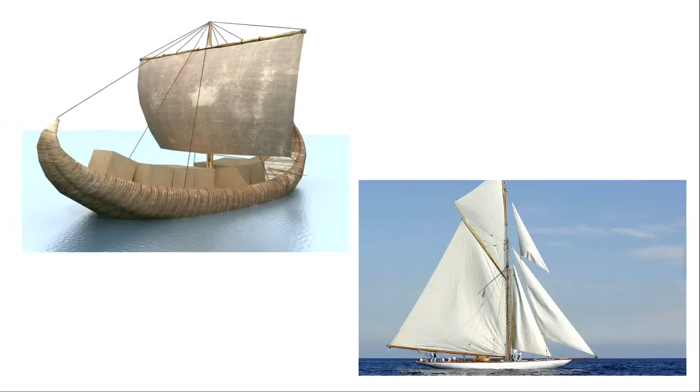And then we have our atmosphere all over, which consists of a very large area. Maybe up to 100 kilometers, if we assume we have some kind of atmosphere, there are so many mixtures of gases over there. And apart from 100 kilometer altitude, is it vacuum? The question is, it's not actually vacuum. It's again a fluid which has a higher intermolecular distance.

So when we talk about the atmosphere, it's a continuum fluid, as if the fluid is continuous. But when you go outwards towards the outer atmosphere, it's not continuous, you call it a free molecular flow. So nowhere is there an escape from the fluid. Starting from biomechanics, from our eyes to aircrafts, everywhere we actually face fluids.

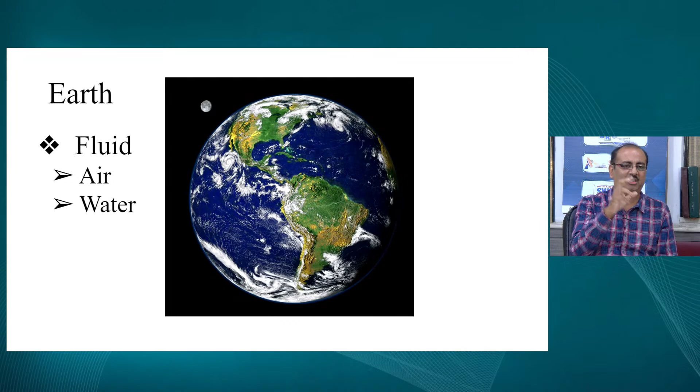Let me come to some of the very typical problems which are seen, some of which have been seen from history itself. There are two pictures shown in this slide. The very first picture is basically a boat which might have been utilized about 1,000 or 2,000 years ago. If you look at the boat, there is a particular sail made of cloth, and then there is a shape of the boat. But then onwards, if you look at recent times, the complete sail has a different shape, and the boat itself has a different shape, probably kind of a streamlined shape.

What could be the reason? Initially the major aim was transportation, but if you look at today's boats, there are so many things—it's being used for transportation, for wars, in sports. So there are plenty of applications of this kind of boats, and based on that, several changes have been made. Were these changes made on their own? No, there are engineers involved, and some design modifications have been made to the sails, depending upon the requirement.

Now let's look into the other slide.

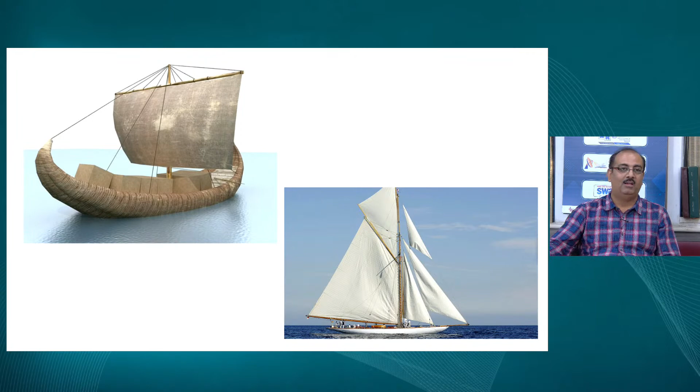Let me show you a typical video of what happens if there is a sudden gust of wind onto a particular chimney. This is an old video which I have taken from YouTube. If you look into this chimney, it is going to vibrate with respect to the wind. You can see the vibration has started, and further it will vibrate more rigorously. If there is this kind of rigorous vibration and it matches with the natural frequency of the chimney, obviously there is going to be some kind of failure.

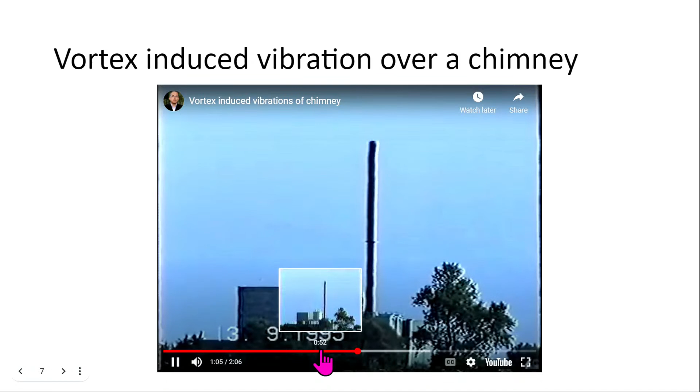So this is very important to understand what exactly is happening over there, and we must get into the physics of the fluid over there. Let me show you another one of the very famous engineering failures.

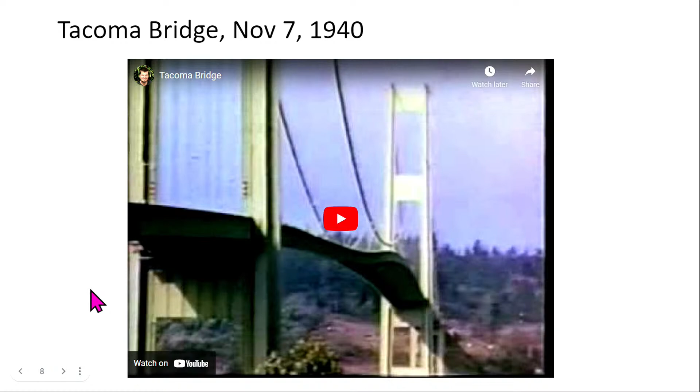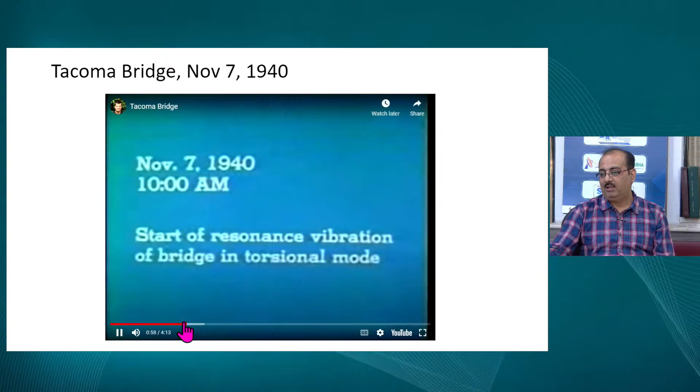At a very small gust of wind, the bridge basically started to vibrate. Once the vibration was higher, it actually matched the natural frequency of the bridge, and the whole bridge's middle section collapsed. This is why I said this is the most famous engineering failure.

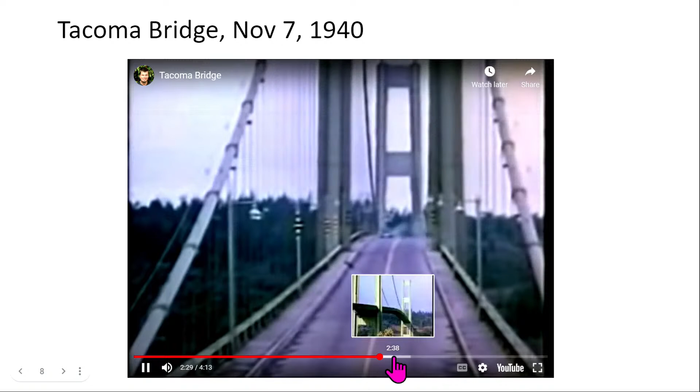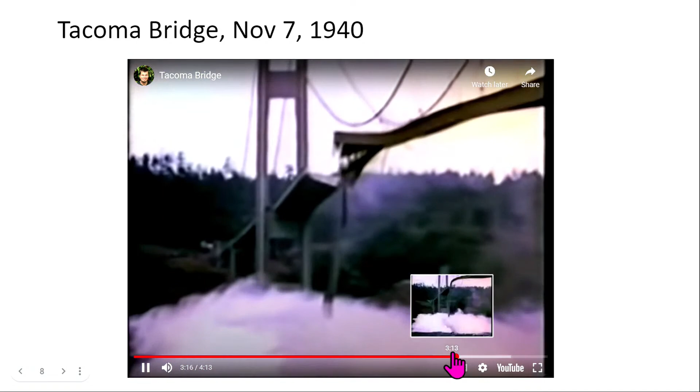Look into the video and see how it is vibrating, how dangerous this could be. Ultimately, a car was stuck in between, and if you see at the end, the middle section of the bridge actually collapsed.

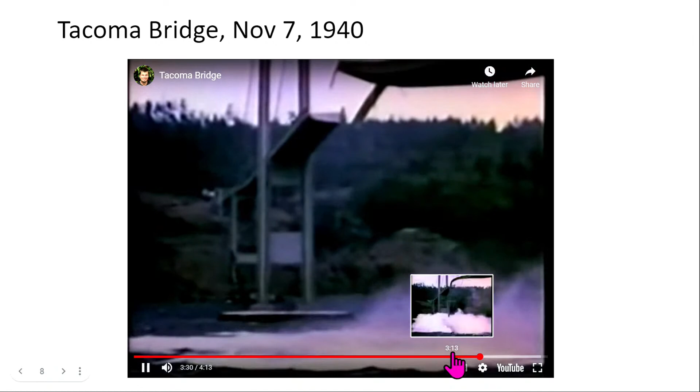The question was, what happened? Later on, it was found, and I'll show you at the end of the slide, that it was aerodynamics, or fluid dynamics, which was responsible for that. So it's very important to go through all these things.

Another very typical creature everybody has faced is a typical fly. You try to hit it and it has such a fantastic maneuvering capability that you will not be able to catch hold of that fly.

The second, or third, is the mosquito. Again, the mosquito itself keeps flying at a very constant speed. What kind of fluid dynamics, what kind of wings, what flapping frequencies, what is it doing? Another fellow is the dragonfly.

All of us might have seen in our childhood, we used to tie a small thread and play along with the dragonfly, but it's so stable that scientists are actually researching the wings of this dragonfly. It has a kind of corrugated wing surface which actually has lesser drag. It basically makes the flow turbulent.

This is a very detailed discussion, but later on, if somebody wants, they can always get in touch with us to get the details of these things. So again, this has a different kind of aerodynamic capability to fly and keep itself stable.

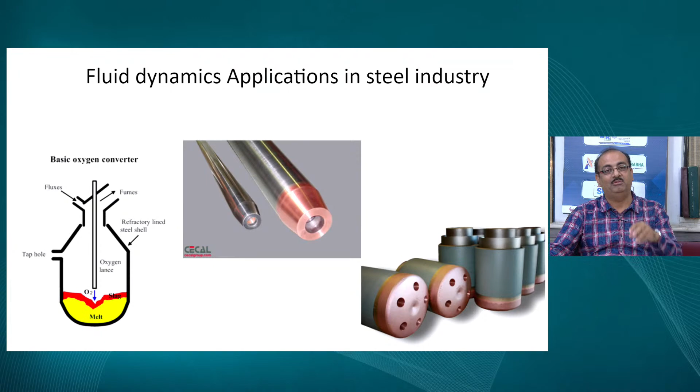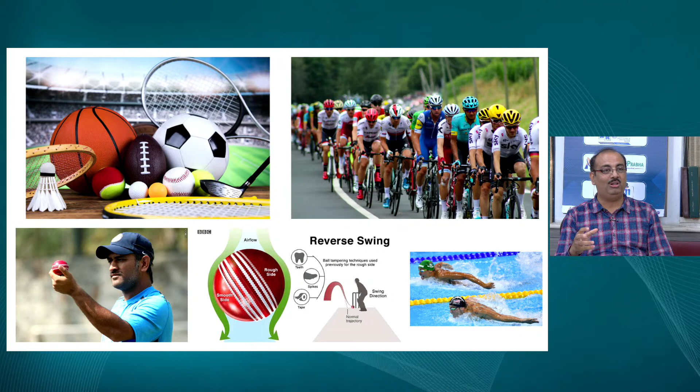You might have noticed that in a cycle race, most bicyclists come down low to try to reduce the drag. One of the most famous cricketers, I have taken his picture, Mahendra Singh Dhoni. The question is, why have I shown this particular picture? To make you aware that the reverse swing the bowlers do is also very much dependent upon the aerodynamics of that particular ball. Again, in swimming, it is becoming very, very important.

The point is, how do we analyze all these problems I had been talking about in the past 10-15 minutes? The answer is the wind tunnel.

So what exactly we are going to do in a wind tunnel is, it's a kind of tubular structure with some differences in the cross-section area. At a particular cross-section, we are going to reduce the cross-section area, and the flow velocity is going to be higher there with a lower pressure. This is what we see in the Venturi effect. And we try to basically find out what the flow velocities are over there, what velocity is required at that particular point. These are the things which we try to find out.

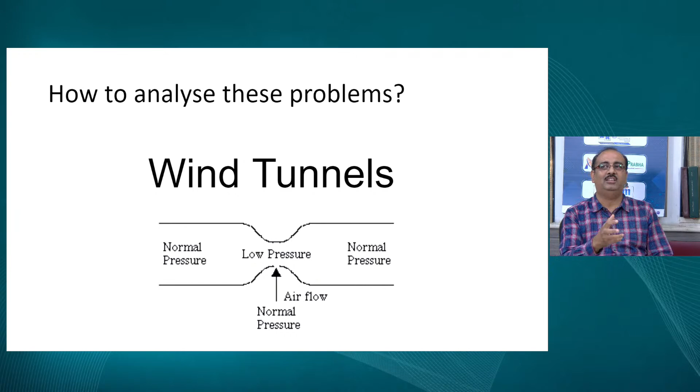So let me tell you why at all we need a wind tunnel. What we are going to talk about is either the body moves into stagnant air, or the air moves onto a body - we assume it's going to be the same thing. Basically, it's the concept of relative velocity. But when you look into more detail, let me tell you that many times we feel it's the same thing, but you know what? There is a lot of difference which comes in between.

When the body is moving into stagnant air, believe me, that's stagnant air - it's not moving at that point, and the body is moving in that direction. But when we are trying to make the air move onto that particular velocity, onto that particular body, in that case we need to see that the flow is undisturbed in the front. That means I'm going to have minimum disturbances in the upstream flow. That is one of the most important requirements of a wind tunnel.

Apart from that, there are a few things we do. We call it geometric scaling - we scale down the model in a similar way, say by 1/20 or 1/30, whatever our requirement is, and then we try to put it inside the wind tunnel. Then there is something we call flow similarity, that is the dynamic similarity.

When we talk about dynamic similarity, we talk about some non-dimensional numbers, because aerodynamics engineers are very fond of talking about non-dimensional numbers. So when we talk about a non-dimensional number like Reynolds number, what exactly is it? Many times when I ask my students what Reynolds number is, they say rho V d by mu. I say no, don't talk about the formula - tell me what exactly Reynolds number is. It is the ratio of inertial force to viscous force - one is trying to push and the other is trying to pull.

When you talk about Mach number, that's inertial force to elastic force. The Mach number is equivalent to flow velocity divided by the local speed of sound, because sound velocity depends upon temperature - it's the square root of temperature. So it becomes very important that when you are doing the experiment at a very high altitude versus inside the wind tunnel, you need to match what exactly the Mach number is. Apart from that, there are several other numbers like Froude's number, Grashof's number. Most of these numbers are supposed to be matched - this is what we call flow similarity.

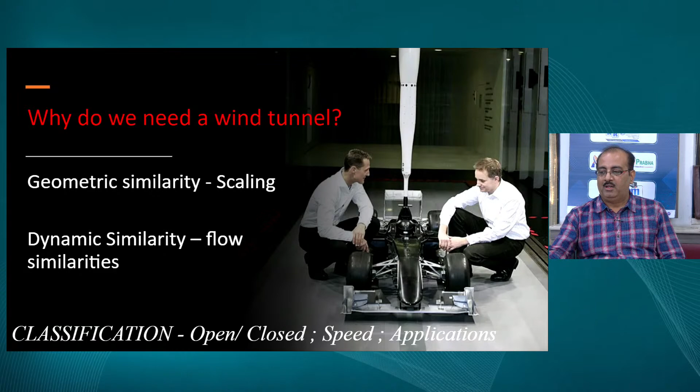When you talk about applications, depending upon whatever application you're looking for - say aeronautical application, environmental application, or building application - whatever you're looking for, these are the applications on which wind tunnels are divided. So let me first show you what exactly is the open return wind tunnel.

On the right side of the figure, there is a typical fan which is placed, and that fan is made to rotate, and this starts sucking in the air from the left hand side of the tunnel. This is just a tubular structure, and within it there is a convergent section, and with this convergent section the speed starts to increase because we are restricting the area of the tube.

So the speed starts to increase, and then you have a constant test section where the speed becomes uniform. That is the test section where we actually place our test models. Whatever I talked about - geometric scaling, dynamic similarity, all those things are supposed to be taken care of within this test section. And then there is a diffuser, where the air is taken out of the tunnel.

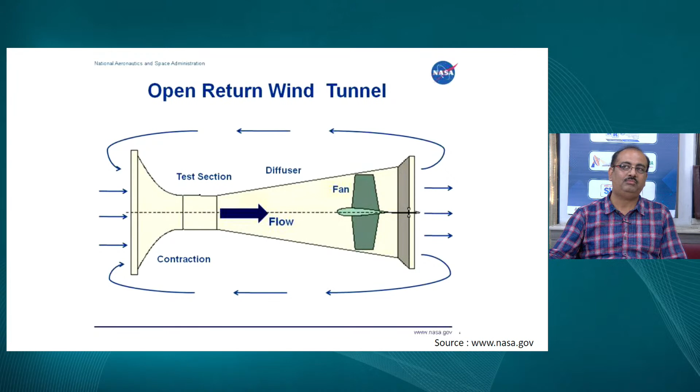These are the supersonic tunnels available at BIT Mesra. It's a blow down type tunnel, again an open type tunnel, and the air is made to go outside. These two tunnels can reach up to around Mach 3.5 if we change the nozzle blocks.

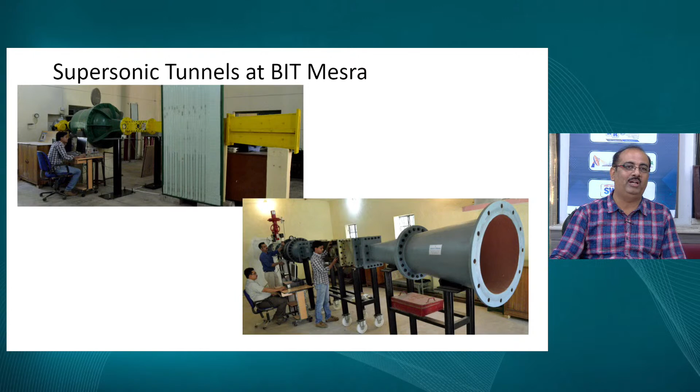There is also the closed return type tunnel. This picture I have taken from the NASA website. This is again a costly affair, but the quality of this kind of tunnel is that you're going to have very good results coming out of it, and the noise is very less.

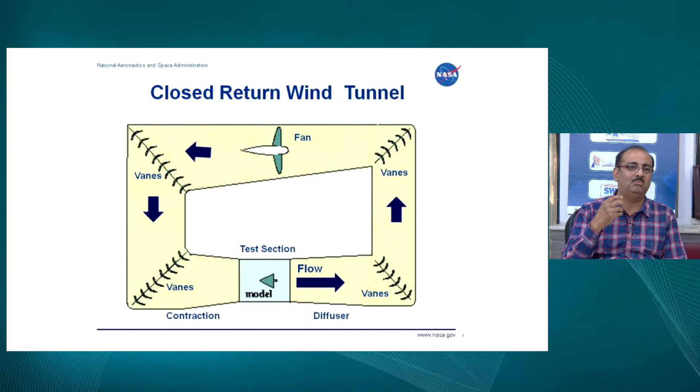In open type wind tunnels, the noise is very high. So even if you want to do some kind of aeroacoustic testing, that can be done over here in closed type tunnels. This is a typical figure which I have taken from the NASA website - that's the closed return type wind tunnel.

So the question is, why open circuit and closed circuit? This depends upon your requirement, what you're looking for. The open type is economical, while the other one is a costly affair. You need a lot of space for a closed return type wind tunnel, whereas the space requirement for an open type wind tunnel is quite smaller in comparison.

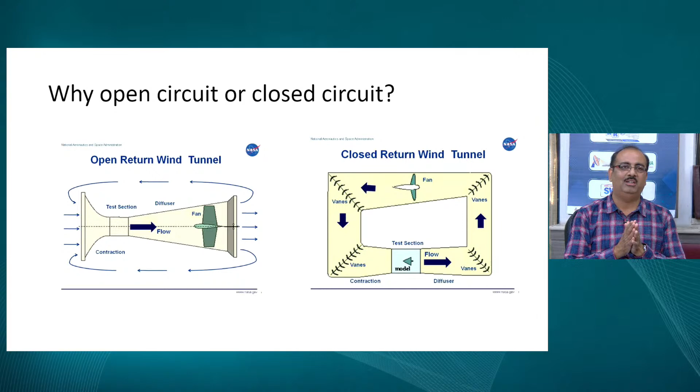The power requirement depends upon what you're looking for. But the quality requirement, the kind of vanes and other things required, is very high in the closed return type wind tunnel. You need to have vanes, and many times you need some kind of cooling system installed in closed return type wind tunnels. So it's basically a costly affair for researchers, but for university or college level, the open return type is more suitable.

Now let me come on to some of the classifications.

One classification is the high Reynolds number wind tunnels. So if I need to go for a higher Reynolds number, what shall I do? Let me get back to the formula rho VD over mu, where rho is density, V is velocity, and D or L is the characteristic length, divided by dynamic viscosity. So in order to increase the Reynolds number, we need to increase the velocity, or increase the length, or increase the density. This is a typical variable density tunnel shown in this figure.

So there are different types of wind tunnels available.

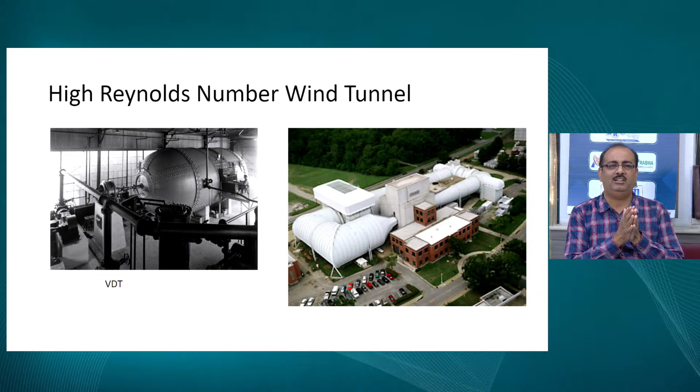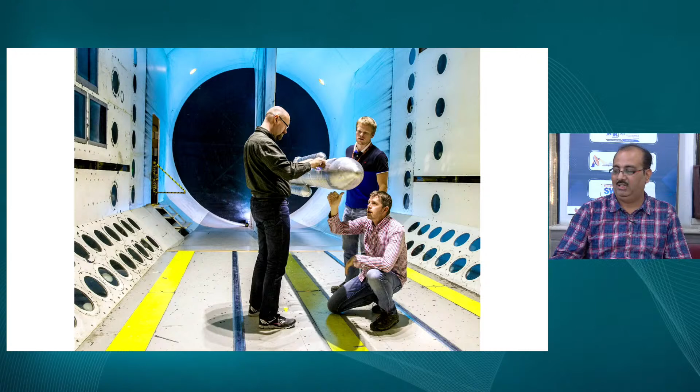This is again a typical variable density wind tunnel in which researchers have put a scaled down model of a reusable launch vehicle to see what exactly will happen to this kind of body. This is a vertical short takeoff and landing wind tunnel. The basic application is to see what kind of thrust is imparted onto these bodies, like helicopters or aircraft which have a very short takeoff.

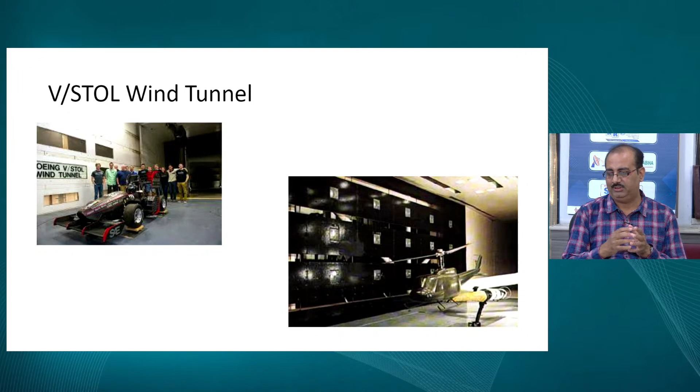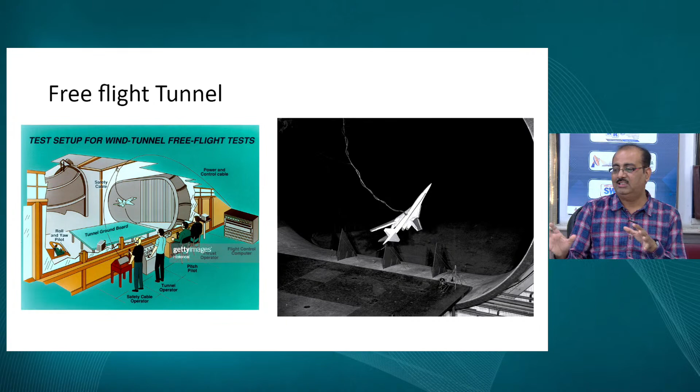Then there are free flight tunnels. You are supposed to hang the aircraft within the tunnel, and if required, even the tunnel inclination can be changed. So this is what we call a free flight tunnel. If you see the second figure, the aircraft model is just suspended with the help of a typical wire, and experiments are being done to see what happens to this kind of body in a free flight condition. Otherwise, as a conventional practice, we mount it with a force sting balance, something like a cantilever beam, inserting force balances within the aircraft to try to see. So this is a typical free flight tunnel, where the aircraft is free to be within the tunnel.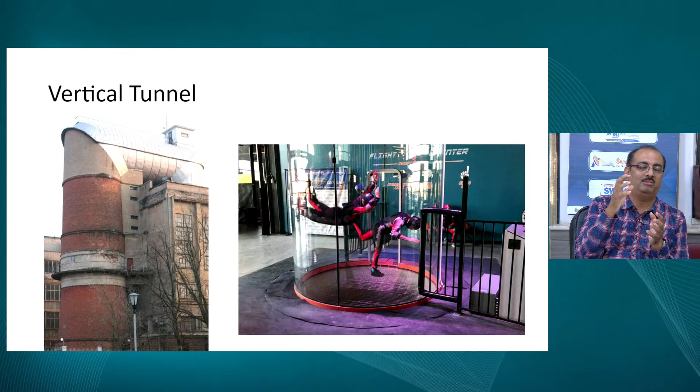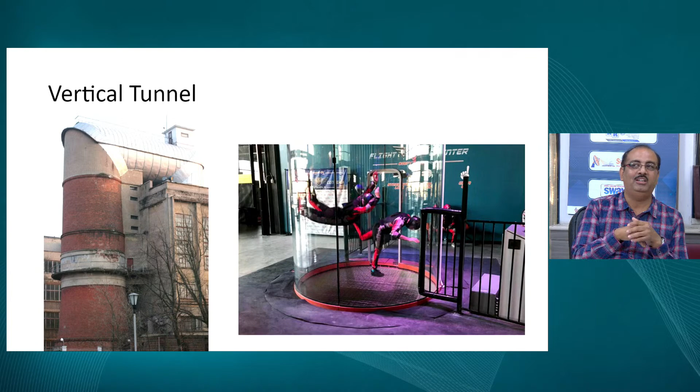Then there is the problem of stalls, stalling of the aircraft when the lift suddenly decreases. For these stalls, or for skydiving or parachute applications, vertical tunnels are used. You can see in picture number 2 there are skydivers on whom experiments are performed to see what will happen to their body if they're diving from the top of an aircraft.

Then we have a propeller tunnel, where basically we mount the complete model of the aircraft within the tunnel, and then we try to see what will happen if the propellers are running, and what way things are happening over there.

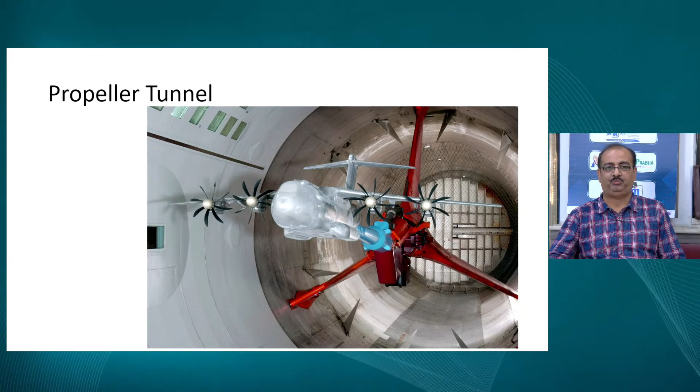Then there are propulsion tunnels, where we need to see what exactly is happening to the aircraft along with the propulsion system, that is the jet engine, or look into the engine nacelles where it is to be kept, and all those things can be seen over there.

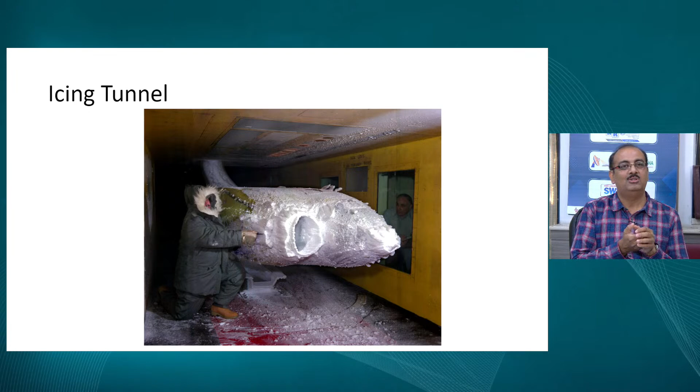Icing tunnels are one of the very important things which are not available at several places, but it is available probably at NASA Glenn Research Center. You're supposed to put up the model, and there is an option of reducing the temperature up to -40°F, and icing takes place. What will happen if these things are there, what will happen onto the body? Because in several conditions, somewhere in Siberia or elsewhere, these things are experienced, so this has to be seen.

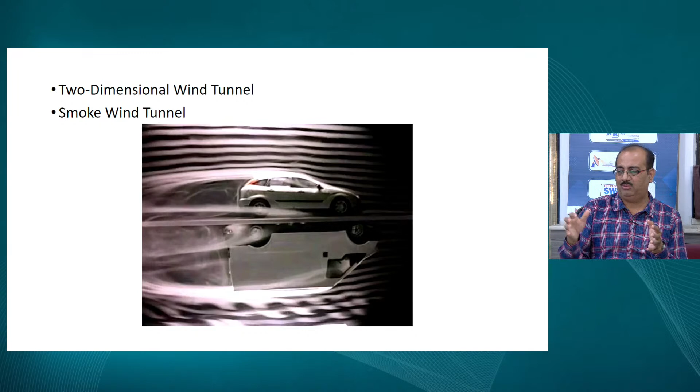There are two-dimensional tunnels, where we basically restrict one of the sides, one of the dimensions, of the wind tunnel, and try to see what exactly is happening in that case. You can see smoke linings which are fed onto the body, and we're just trying to see what is happening, what way the flow is adapting itself according to the body.

Then there are automobile wind tunnels, one of the most important things. We need to understand the difference between the aeronautical tunnel and the automobile tunnel, because one of the most important things is the ground effect—the bottom of the wind tunnel is expected to have similar velocity to that of the moving body. If you have a stationary flat wall, a boundary layer will develop, which may affect the aerodynamic characteristics of the vehicle. So we need a moving surface in the wind tunnel. That is one of the most important requirements, as observed in some of the tests performed here. You can see the pictures.

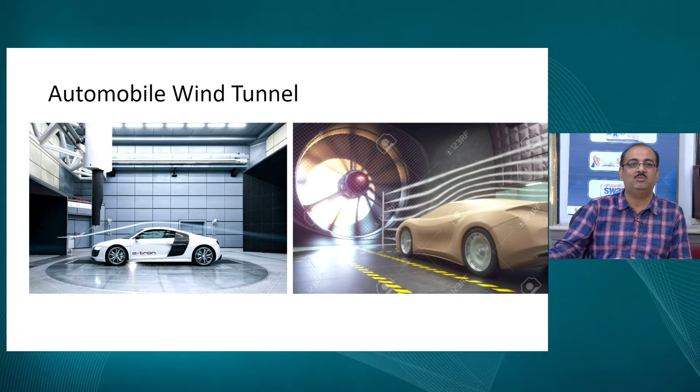Again, the ground effect is one of the most important things to be taken care of. Imagine you have a very high ground clearance of a vehicle, and the vehicle is supposed to move at a very high speed. What will happen? It will just act like an aerofoil, and you'll have some kind of lift developed, which may try to topple that particular vehicle. So that needs to be understood.

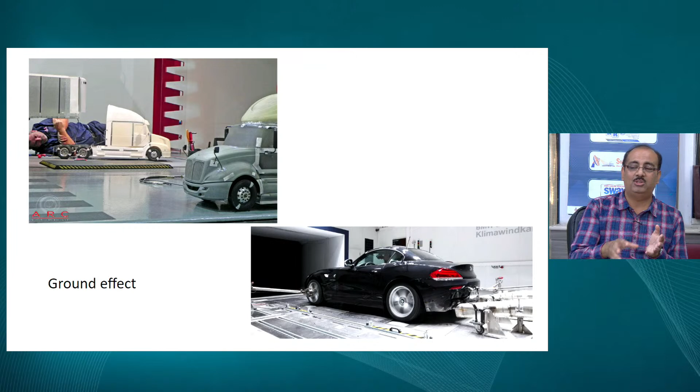One of the news I saw was that Ford has invested around $200 million US for establishing its wind tunnel for automobile testing. So people are investing a lot.

There are climatic wind tunnels. If we have some kind of fog, what will happen onto the body? What way is it affecting the characteristics of the body? Similar things apply to rain. If you are moving in rain, these things have to be taken care of, and the testing needs to be done.

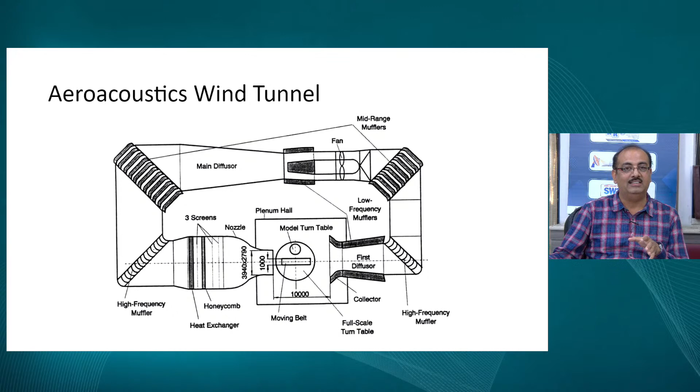There are aeroacoustic tunnels where we try to see what kind of noise is being generated due to the pressures. These are very special, robust tunnels, and you need an anechoic chamber so that sound from outside cannot be acquired inside. There should only be the specific sound coming out because of the flow. This is a typical anechoic facility in our aerodynamics laboratory at BIT Mesra. You can see from inside, this is the anechoic chamber.

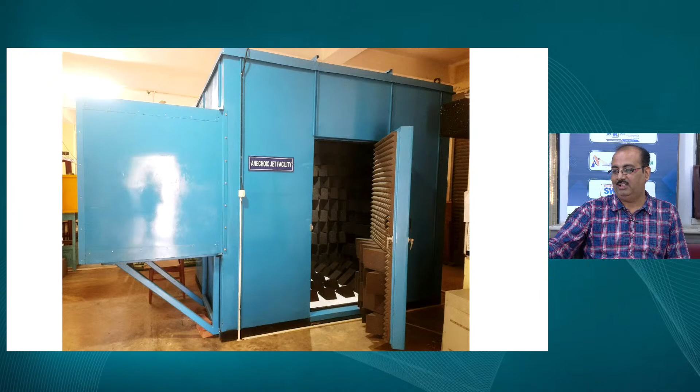Then there are water tunnels, where testing can also be done. Apart from that, there are general purpose wind tunnels, for example for people like cyclists, or plenty of other sports. There are tunnels for birds and insects, wind powered devices, like wind turbines. Then you have solar panels, radars, antennas, even dish TVs mounted onto rooftops. They face a lot of wind problems, and cracks can develop, so there also you require this kind of wind tunnel testing.

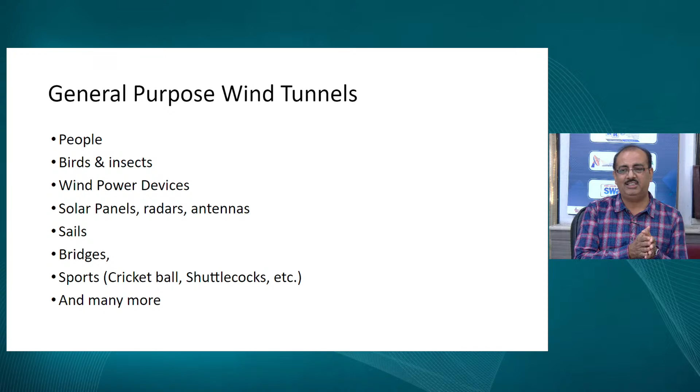Sails, bridges, sports, and several others I've talked about. There are environmental wind tunnels where you can simulate a whole city condition, simulate the flow within a particular city. What will happen if there are multiple buildings, what will be the flow physics onto that area? These things can also be visualized using wind tunnels.

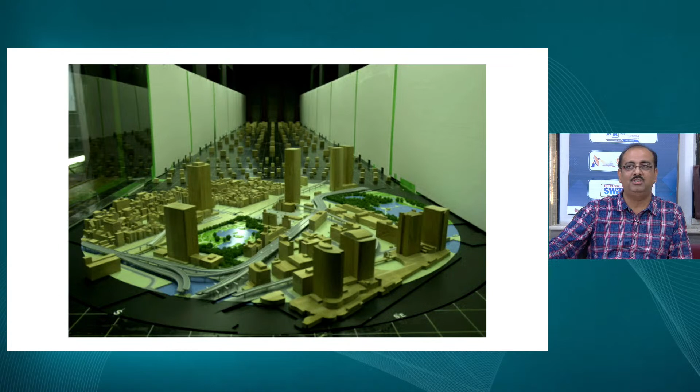Some typical types of investigation can be divided into two parts: qualitative and quantitative. In qualitative, we should be able to see something through our naked eyes and understand what kind of flow is happening onto the body. In quantitative, we are basically looking for some kind of measurement, for example measurement of pressures and measurement of forces.

In qualitative visualization, there's flow visualization done by oil flow technique. There's a typical tuft flow, a very crude mechanism, where we place small woolen tufts and try to see how they adapt themselves according to the flow. We also have mini tuft flow visualization, and one more visualization called Schlieren photography, which captures changes in density.

Then you have the quantitative measurements I talked about: measurement of forces, moments, pressure, and unsteady velocities. There are some new techniques that have come up in the past two to three decades, like particle image velocimetry, PIV, and pressure sensitive paints. We coat the model with a typical chemical compound, and once you start the tunnel, mainly for high speed tunnels, the paints try to adapt themselves according to the flow, and changes in color can be observed.

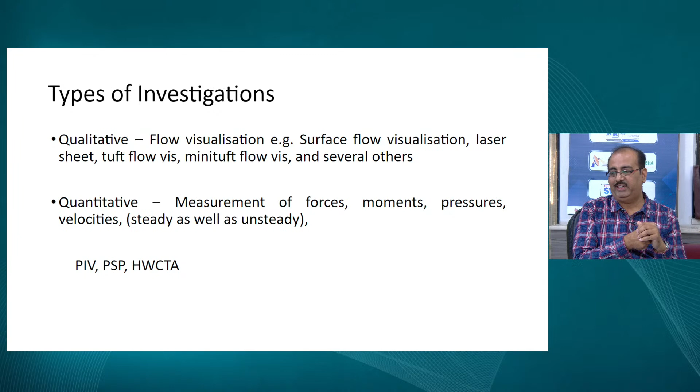There is the hot wire anemometer technique, which is quite old but a very good technique to get all these details.

Some of the flow visualization techniques which I have taken from NASA's website are the laser sheet. You put a laser sheet onto the surface of the aircraft, on the cross section of the aircraft, and try to see how these flows are adapting onto the body. Then you can see that some oil dots are sprayed onto the body, and what way these oil dots are adapting itself. Then you have the Schlieren photography, which is a typical optical technique utilized to see the changes in density.

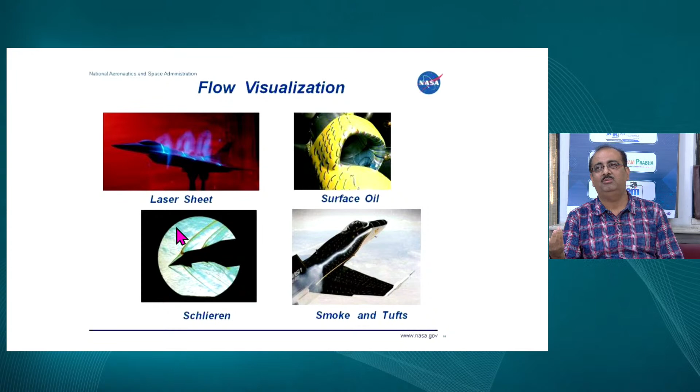And then you have several smoke and tuft flow visualizations. This is again a smoke flow visualization, which I already showed you. Now this is a laser sheet which has been kept in the cross section of a particular body, and we are trying to see what way the flow is adapting itself according to the flow.

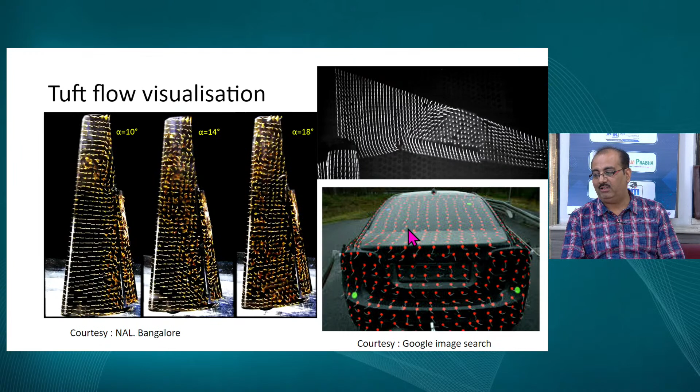This is a tuft flow visualization which I took from the NAL website. You can see there are some woolen tufts, small woolen tufts, which are placed onto the wing model. If your wing is at around a 10-degree angle of attack, what way these tufts are changing, and what will happen if it has a 14-degree angle of attack. You can see the differences, which basically represent that at a very higher angle of attack, your flow no longer remains attached, it gets separated, and you'll have a stall over there, so your lift is going to reduce. Similar tuft flow visualization is also done on automobile models.

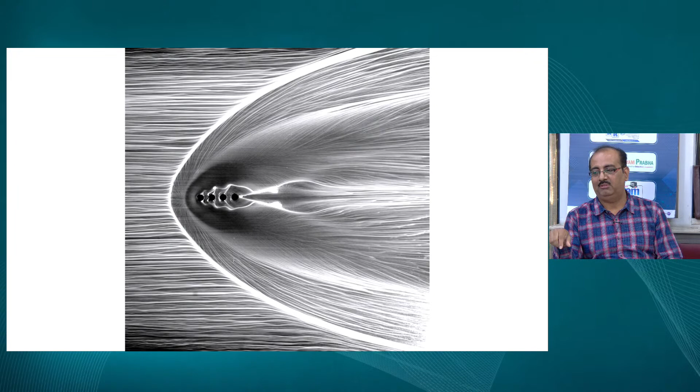This is a typical oil flow visualization which has been done on a protrusion kind of stuff. So what you do is, even if you look into rockets, they have very small rivets, or very small sensors which are protruding outside. So what will happen if it experiences a supersonic flow? We spray oil dots onto the surface of the body, and we just try to see what is happening.

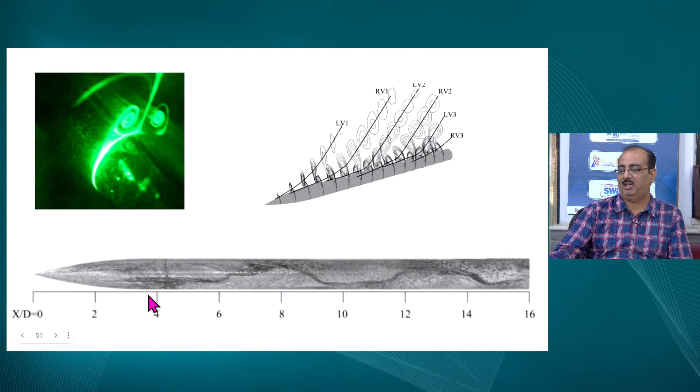Then again, similar laser flow visualization, and we do something using computational fluid dynamics. We solve the equation and try to see what way the flow is going to behave. Again, you can see this is a typical oil flow which has been done on typical missile models. These are some results on delta wings, on reusable launch vehicles, and again some jets. Maybe some more oil flow and Schlieren photography pictures are there.

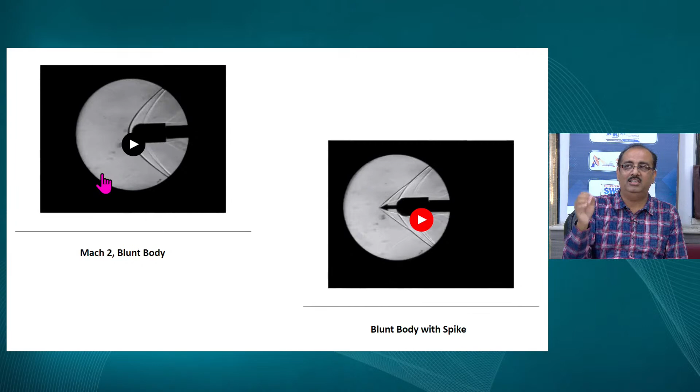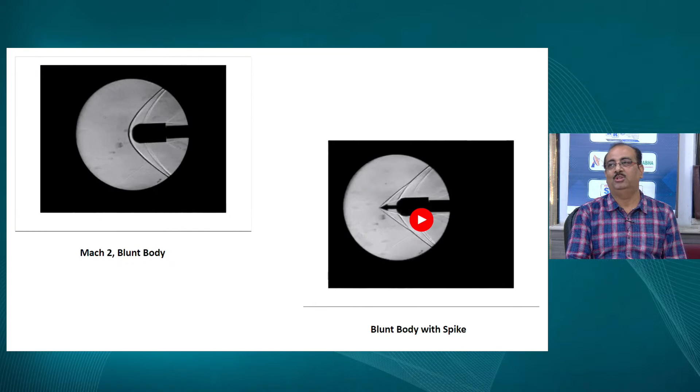It will be much better when I show you this video, which has been done in our own laboratory, where a blunt body is actually facing a supersonic flow of Mach 2. With your naked eyes, you won't be able to see what kind of shock wave is coming out over there. But with this typical Schlieren photography, we are able to see what happens in front of this body. If you see, the tunnel is going to start, and all of a sudden you'll see a bow shock which has come up onto this, and this bow shock is going to be very, very strong, and it's going to put a very large drag onto this body.

So in order to reduce the drag on this body, what is being done is we actually place a typical spike in front of it, and you see that the whole bow shock is now actually seen as an oblique shock on this body. If any more details are required, you can always get in touch with me, I'll give you more details about it. But this picture clearly shows that the bow shock has transformed into an oblique shock with the help of a spike.

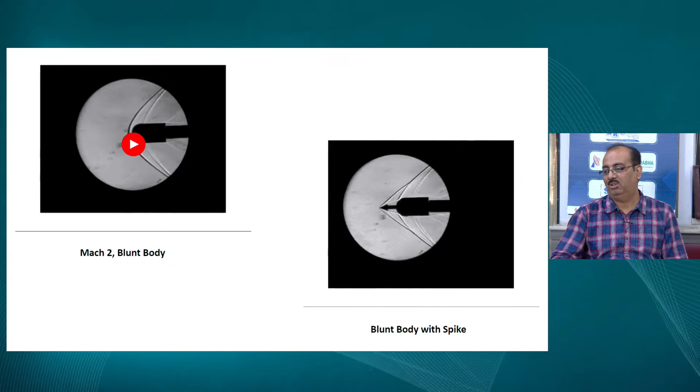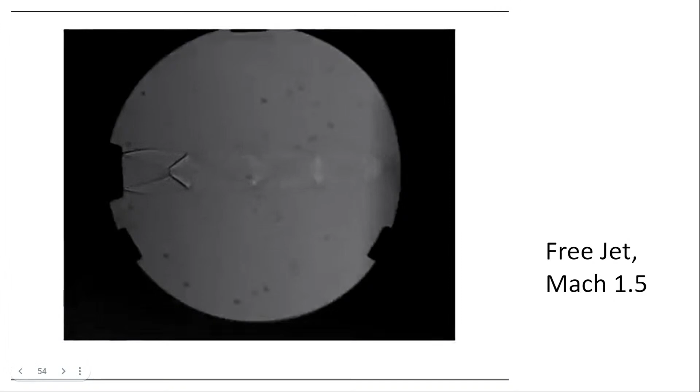Let me show you a typical free jet Schlieren photography, where you can see the Mach disk, something like the exhaust of a rocket, what way things are going to behave. So this is what you see in a free jet kind of visualization over here, Schlieren photography of a free jet.

Now CFD is again a very important part of today's fluid dynamic application. We call it computational fluid dynamics, but you have to be very, very careful when you are trying to simulate any kind of computational fluid dynamic simulation, because you basically need to compare it with realistic cases. So I was talking in one of the slides about the buildings. If I just put one building, two buildings side by side, let's say, I have just done the two-dimensional simulation of what is happening onto the floor.

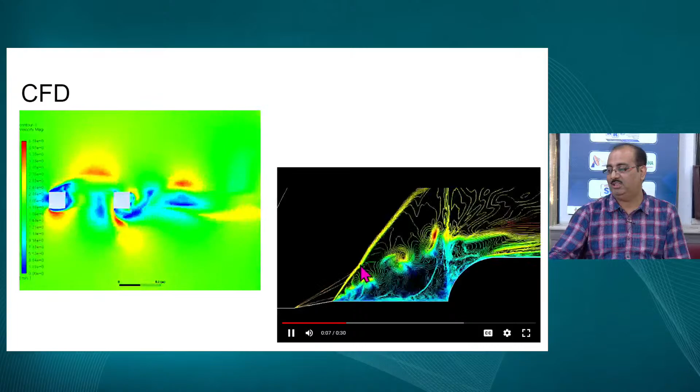This is what you can see, right? The vibration or differences in pressure and velocity change the pressures around this body, and affect the body downstream. That's very important. Now the next picture shows a blunt body with spike, similar to what we saw in the Schlieren photography earlier. You can see an oblique shock developed here, where the frontal portion represents the spike, and the hemispherical portion represents the blunted body we just saw in the Schlieren photography.

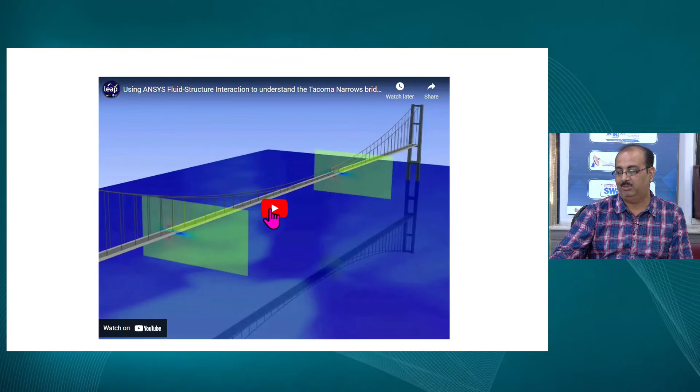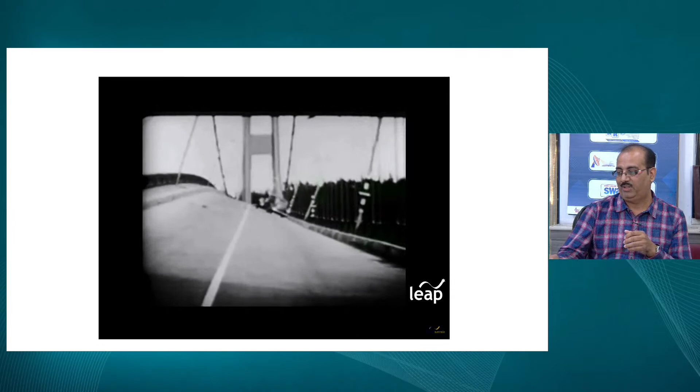Let me show you another typical comparison done by ANSYS for the Tacoma bridge failure. This was the Tacoma bridge that actually failed, and when the simulation was done, this is what was seen. Computational fluid dynamics plays a very important role in comparing this data and getting more details of the fluid flow. So this is what happened, and if you look at different cross sections, this basically made the bridge vibrate.

Based on these analyses, I can definitely say that for any kind of construction, it is very important to do testing beforehand so that structures are not disturbed because of fluid flow problems. Even for automobiles, it is one of the requirements these days, though this is not much seen in India. So I would definitely refer automobile researchers to look more into automobile aerodynamics.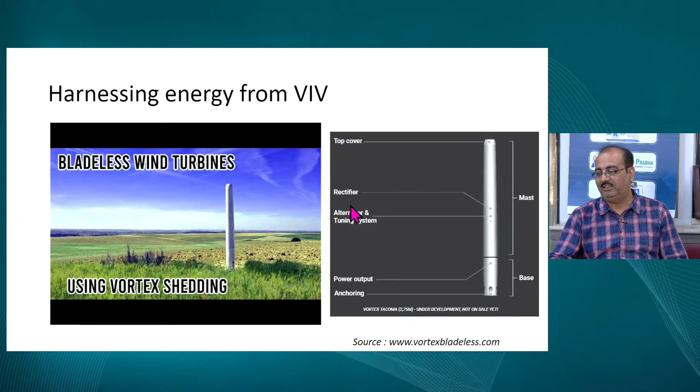Apart from that, we had talked about failure because of vortex shedding, and I said it actually leads to failure. But Vortex Bladeless people are developing bladeless wind turbines, trying to harness energy from the vortex-induced vibration itself. They have placed some kind of alternators, and they are trying to find a way to do this. If you look into this video, it itself shows there are some issues, but it will show what way the turbine is vibrating and how it is trying to get power out of it.

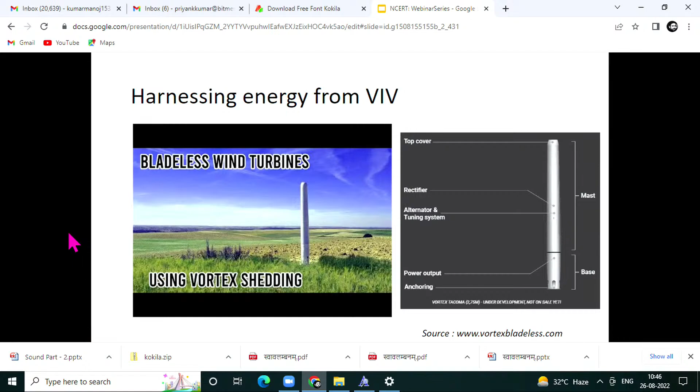So it can also be used in a constructive way. Thank you very much.

It was a wonderful presentation, sir. We learned a lot of things regarding wind tunnels and how they're used for different purposes, and there are so many types of wind tunnels used entirely in the industry, be it automobile industry or other industries. You showed in one of the pictures construction sites where you said they need to be checked before getting into use.

So the fluid needs to be checked. Here we have a live example of the Noida Twin Towers. Everyone has heard the news, they are being demolished, and the news says it's unsafe for people. So is there any wind tunnel error or construction error related to our subject today? See, probably it's not very common in India that people do building aerodynamics. There are very limited cases done in India. So I'm really not very sure about that, but definitely it could play a major role, because with such high twin tower structures, there could be some issues of fluid dynamics, there could be some problems.

So definitely, Dr. Priyank, it was wonderful listening to you indeed. But coming forward with what Tanvi has raised as a point of interest today, because this Noida Twin Tower destruction is in the news nowadays, it is going to take place on Sunday, August 28th. There are many questions related to it at this moment.

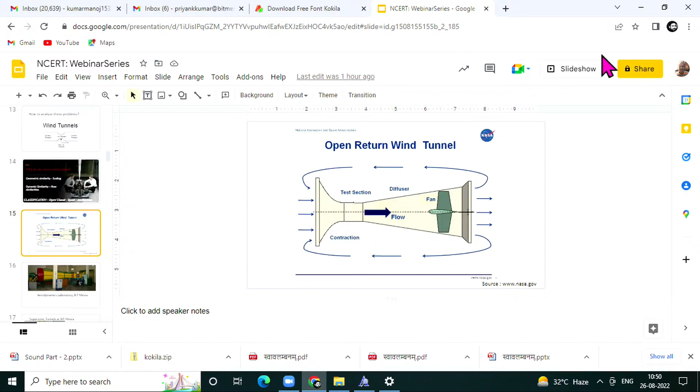Okay, so now you took the example of a test section, 2 feet by 2 feet, and in the next slide you showed the tunnel at BIT Mesra. Can you correlate that particular 2 feet by 2 feet in this diagram? Please use the arrow around it. So 2 feet by 2 feet is the height and the width of the wind tunnel. And how about the length? Length is of the order of around 1.5 meters or so, roughly 6 to 7 feet, around 6 feet. So this is such a simple, not very large kind of test section.

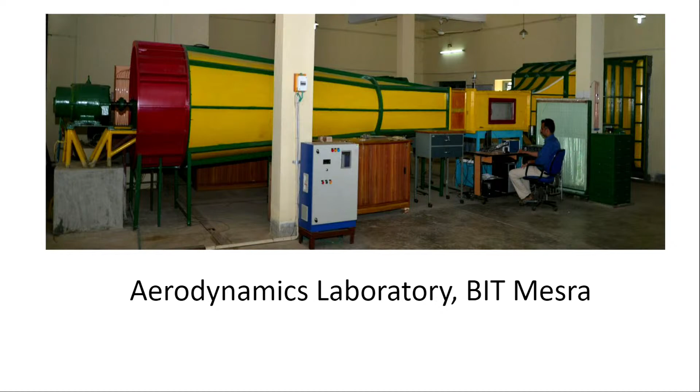When you talked about dynamic similarities, when you scale down the buildings and the phenomena or vehicles, then we see reflections from the boundaries. You said that closed boundaries are going to have probably even more effect than what you'd have in open systems, open tunnels. So how do we handle all this and descale things so that one can realize the true picture?

Yes. So basically, when you talk about open circuit or closed circuit wind tunnels, the basic idea is we are going to have some kind of uniform velocity within the test section. This is the definition of a test section—uniform velocity is required there. Now, when trying to reduce scale, as a thumb rule, we try to keep the blockage ratio, that is the area of the body to the area of the whole test section, less than 5%, so that we are in a free zone and the flow is not disturbed because of wall effects.

So roughly, considering this 5% scaling factor, what are the dimensions of the wind tunnel? Suppose if I want to check an e-rickshaw, its size is roughly 6 feet by 5 feet, and height is roughly 6 feet or so. Now this structure's wind speed is not going to be more than about 30 kilometers per hour, in any case not expected to be more than 40 kilometers per hour. It's in the low subsonic region, very low subsonic region.